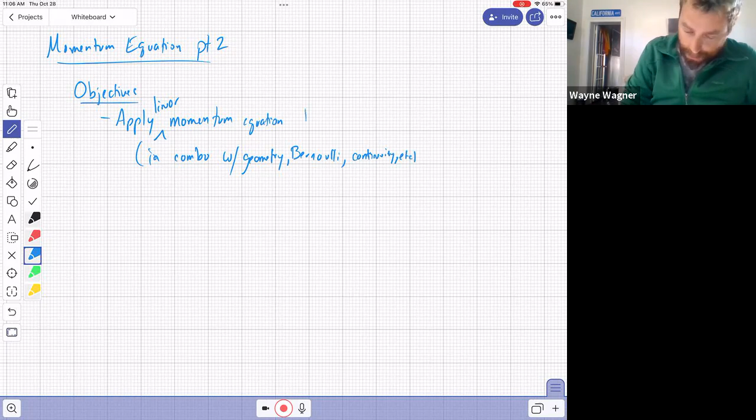Okay, to solve problems, and that's what we're going to do today. How many do I have? Looks like I've got quite a few. I've got 3.

Okay, so let's begin. One of the nice things about working on this board too is I don't have to erase stuff, so we can just kind of move to another area. Okay, so the first problem, this will be example 1 for today.

Okay, given. So we're going to start with forces in bends. This is important because you need to stabilize a pipeline. Okay, so here's what's given: this is a vertical bend. Remember, if it's a horizontal bend, that means it is in the XY plane. This is in the XZ plane, so this means it's going against gravity.

Okay, so here we go, so it's kind of this weird, like it's a bend, but it's also narrowing.

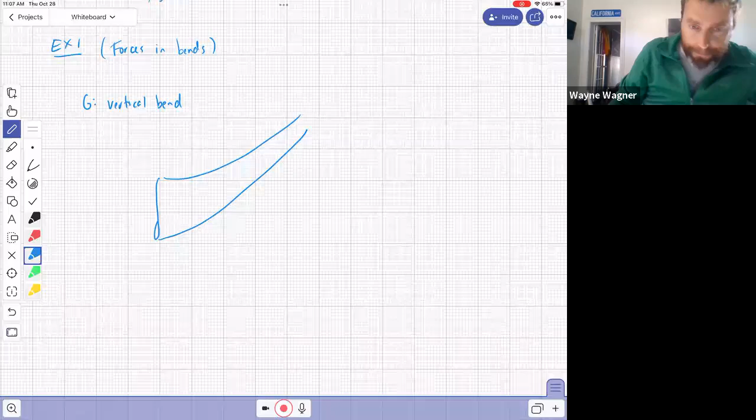Okay, here's our Q, going in this direction. One thing to note, the way I drew these, this is inside of a pipe, so the pipe continues from here. It is not exiting into the atmosphere.

From this point right here to this point right here, there's a distance of 2 feet. This angle is 45 degrees. I hate 45 degrees. I will never give you 45 degrees on an exam unless I screw up, because then I can't test if you know your sines from your cosines.

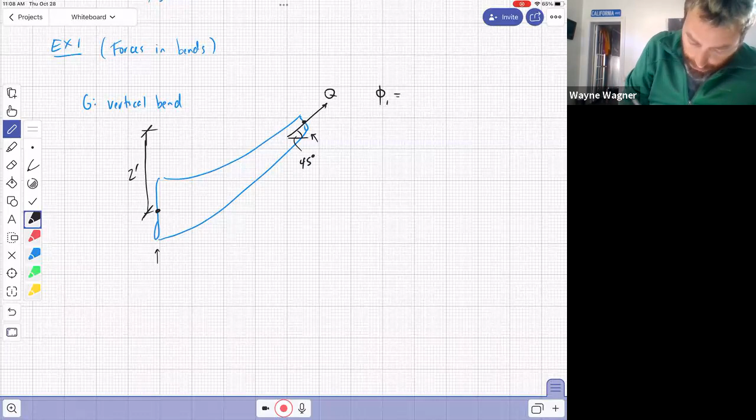So we are also given phi1, which is 2 feet. It's always nice when they give you the points like this. Phi2 is 1 foot. This angle is 45 degrees. Q is 15.7 CFS, I think that's a pretty common number. Pressure at 1 equals 21 PSI.

The mass of the pipe equals 1,000 slugs, and the volume of the water in the pipe is 10 cubic feet.

Required: find the force of water on the bend. Force of water on bend. Solution.

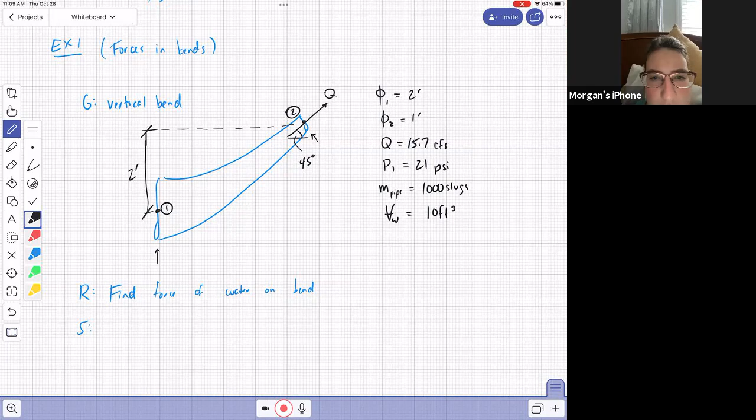First of all, intuition. Which way is the pipe pushing on the bend? What do we expect, left or right? Left. Okay, so you think the water is pushing this way. What about up and down? Up. Which way? Up. Okay, so we think the water is going to push this bend to the left and up.

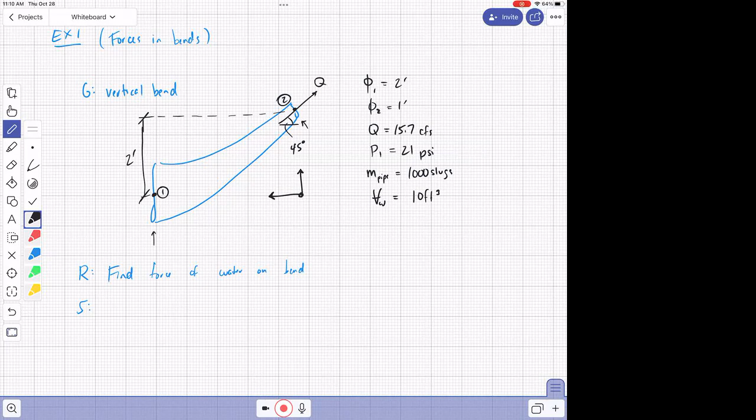But that doesn't work. I mean, unless I'm misunderstanding something, that doesn't necessarily work. What doesn't? Is it flowing out of the right end, top right end? That's what I have backwards right now. Well, this Q is telling us which way the water is flowing. Okay, your assumptions are going to be these are going to be the wrong guesses, but we'll work it out and we'll see why.

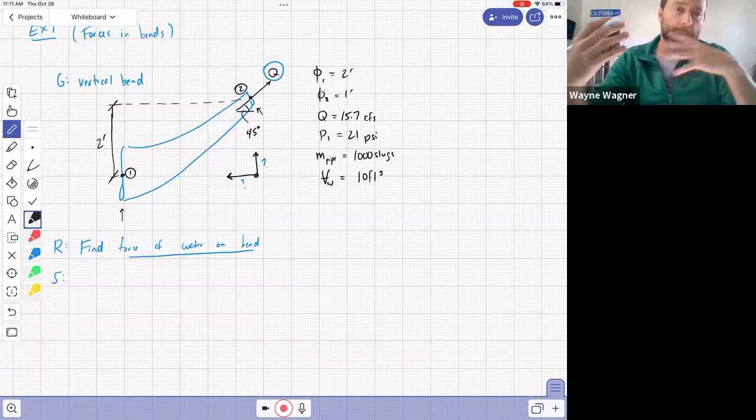So the first thing we're going to do here is we want the force of the water on the bend. This is an interesting question because there are two different ways we can do this. We can draw a free body diagram of the bend and the water, or just write a free body diagram of the water. But in this case, because we want the force of the water on the bend, we need to separate the water from the bend, so it needs to just be the water. If I were to ask what is the force to stabilize this bend, then I would draw a free body diagram of the bend and the water, and I'll demonstrate that as we get towards the end.

So the first thing here is I'm going to do a free body diagram of the water. Just the water. I'm not going to spend a lot of time on this because I've got better things to do with my life. So here we go.

Now I want to start thinking about forces. We've got body forces, we've got surface forces. Somebody shout out some forces we've got. What's the body force? Weight, right. So we got a weight going right here, and that's the weight of what, the water or the bend? The water. Right, because this is the free body diagram of the water.

All right, what else do we have? Now we've got surface forces. So everywhere where I remove the rest of the world, there's a force. Let's start with normal. Normal, what does that mean in this case? Well, because we know the direction of the water is going kind of up and to the right, I would assume that normal is still down with weight, but I think that's the wrong assumption.

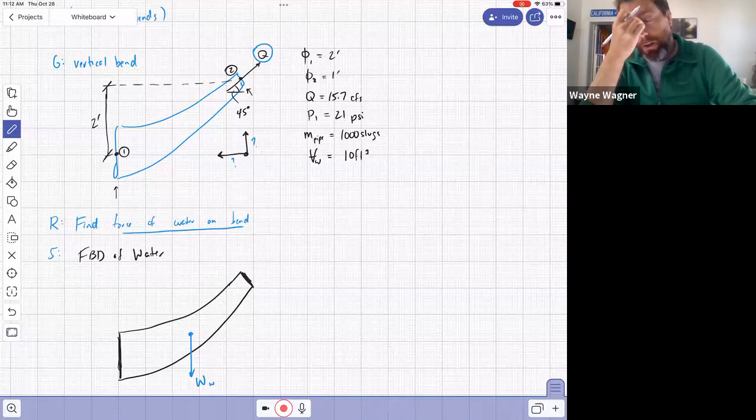Let's back up. Normal force means that two things are touching each other, right? So which two things are touching in this particular normal force? Is it the water and the bend? So there is normal force along these walls, which we might think of as pressure. I'm not going to worry about that normal force right now, and I'm going to explain that in one second. What other forces are along those walls?

Friction. Friction. Okay, so we've got two forces. We've got friction going this way. Okay, and I know it's going that way, or viscosity. And I know it's going that way, and I know I got this normal force. I got all that stuff, and the reason that I have all that stuff is because, well, I've got fluid

flowing through a pipe. Okay, but the thing is, I'm going to combine all of those into the force of the bend on the water. Okay, and I'm going to do that in the x direction and the z direction. I'm just going to assume positive force of the bend on the water in the x, F_Bx, and force of the bend on the water in the z, F_Bz.

Okay, so those are my two, those are just a combination of all these little tiny differential forces. And I'm not going to worry about breaking those apart because it didn't ask me to. And there's no way for me to do that anyway. All right, so that takes care of this surface and that surface.

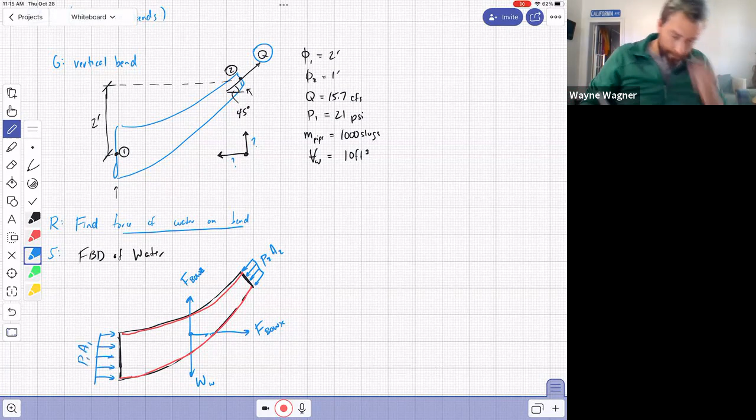Okay, so now we've accounted for all of our surfaces. We got all our surfaces and we did our body force. So now we know we've got them all. Now we have to deal with momentum, which one of you just mentioned. So momentum is going to be accounted for as, I wish I could just erase that red. So the momentum will be accounted for with lines showing where something crosses the control surface. Okay, I guess I'll do it in red.

So here's a momentum term here. This is going to be V2. Okay, and I always make sure that they cross the control surface. So that kind of tells me where in the equation I'm going to put these things. Okay, and here's V1. Okay, so now I've got my free body diagram.

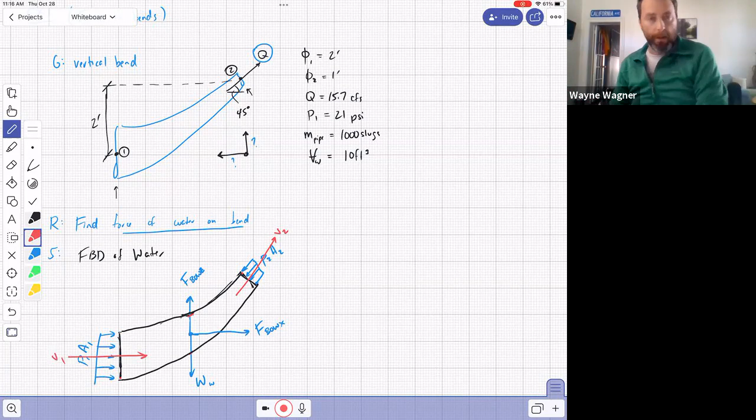By the way, y'all need to work on free body diagrams, clearly identifying forces. You know, I shouldn't have had to pull teeth on this one. I mean, I can understand forgetting pressure, but you got to be able to identify forces. Just saying that. Okay, so here's our free body diagram.

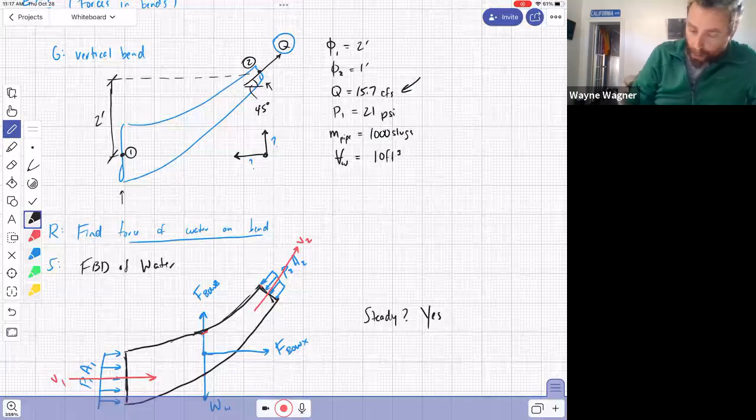Now from last class, I said basically we're going to look for two basic assumptions. One of them is, is this problem steady? And if we look up here, we were given a single Q. So that means we're basically going to say, yes, this is steady. And then we also want to know, does it have a uniform velocity profile, i.e. does V equal V average for the openings? And the answer there is, well, actually, we aren't even given V's. We're only given Q and areas. So we have to assume that this is true too.

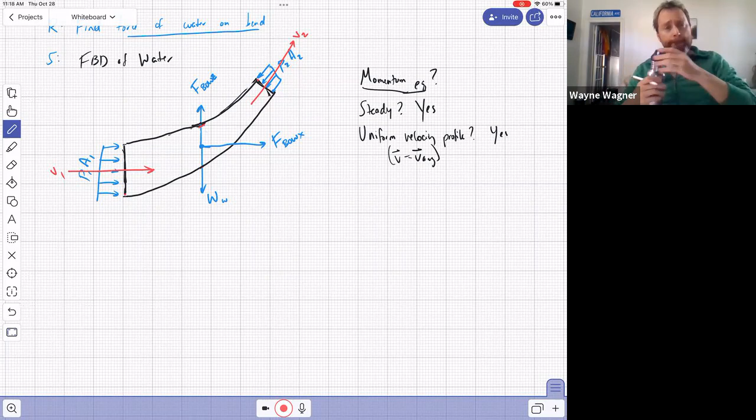If that's the case, then I can use the kind of simplified momentum equation that we've been working on. So again, how do I know that I'm using the momentum equation? Well, the way that I know is because it's asked for forces on a moving fluid. And the only way you can get at that is with a momentum equation. If the fluid's not moving, you can use hydrostatics. A lot easier.

So anyway, the momentum equation, if we can answer yes to both of those questions, can be written this way: the sum of the forces. Notice I'm going to do X and then I'll do Y over here. Sum of the forces in the X. Plus the momentum flux in, rho V_X Q. Well, that usually has a summation in front of it too. Summation in equals summation out of rho V_X Q.

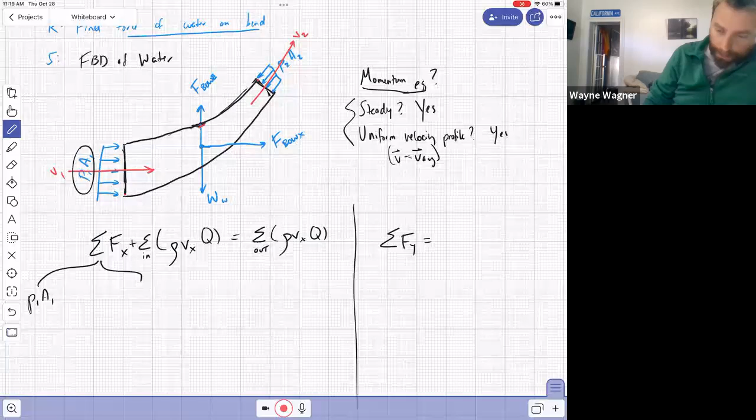Okay, so now we just have to identify the forces in the X. So we're just going to spread this out like this. And so I got, let's see here, we got P1A1. I've got P2A2, which is going backwards. And it's at an angle, cosine of alpha.

Plus F bow X. Okay, those are my forces. Any questions on that?

Okay. By the way, I didn't mean to be too hard on you guys about the finding forces, but my guess is whoever taught this to you did not make you all do enough free body diagrams, and it's just an important skill.

You care. It's okay. What you're asking us to do is we're missing pieces because of obviously the situation. So honestly, it's nice to have somebody care. So I think hopefully everybody understands that you care. It's not that you're even trying to fuss. You're just trying to make us understand that it's important because you care. Right. Well, I am fussing. They're a lot easier for me after I've been awake more than an hour too. Okay. All right. So anyway, I just feel bad when I am rude. So anyway, here we go.

So now this is going to be my in terms. I only have one in term. Sometimes there'll be more than one, but in this case, there's only one place where it's coming in. So these are in red, right? I did these in red, these momentum fluxes. If you have one of those pens or pencils that has multiple colors, it can be nice to draw these in multiple colors, to keep track of what's a momentum and what's a force.

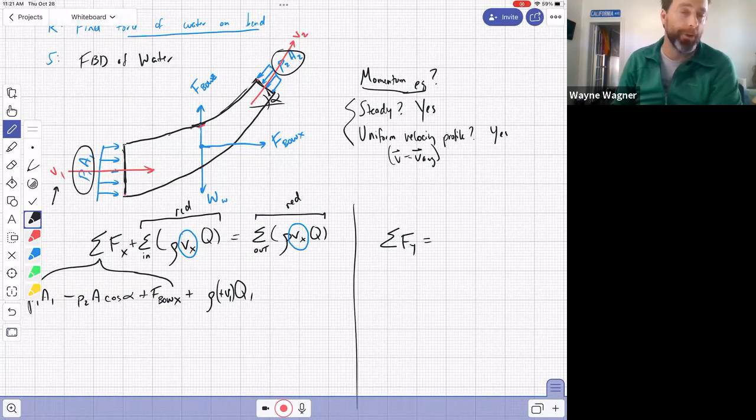And then this is going to be Q1. One thing that I like to do, you'll see this sometimes in my notes, is I'll put a little plus sign there. That just reminds me that I checked the sign or the direction. Because then when I do the right-hand side, this is only V2, right? That's my only out. So I'm going to get rho. So this is V2, so that's going to be positive V2 cosine of alpha.

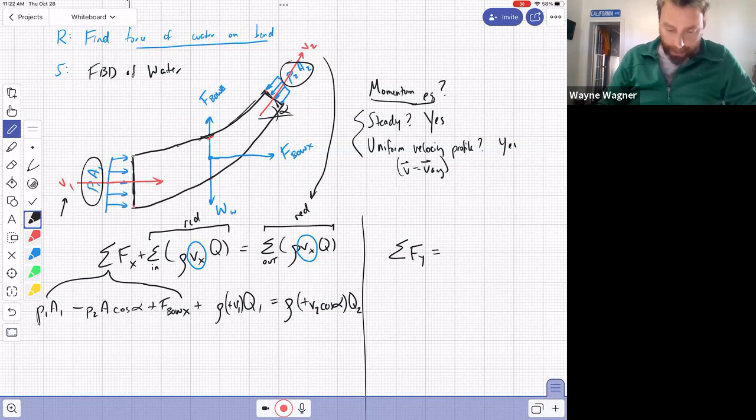And this is going to be Q2. Now notice that Q2 and Q1 are the same, but I just put it as Q1 and Q2 for now, just so you'll be reminded if you're looking at this later, like, oh, I had a problem and it's got 2 Q outs, or 3 Q outs or whatever. Well, you need to separate that all out. Okay, so then this leads to the question. This is nice because this is what we're solving for right here.

Okay, so now we need to think about what we know and what we don't know. I don't know my areas, but luckily I can get those. Right, this should have a 2 on it. And I don't know P2. I know alpha, I know P1, I know rho, I don't know V1, I don't know V2. Those are all the things that I need to solve for. So let's go up here and do my asides. You guys have probably noticed I like to solve with asides. So let's start with those areas. Okay, aside.

Looks like when I solved this the first time, I didn't get the areas, but let's go ahead and do this. So area 1 and area 2. That's pi on 4, pi on 4. And diameter 1 is 2 feet squared and diameter 2 is 1 foot squared. So this is just going to be pi feet squared. And this one's going to be pi over 4 feet squared. Those are annoying numbers, but those are exact. I'll leave it like that for now. We can plug those into this equation. Okay, so now we got this. Any idea how we're going to get P2?

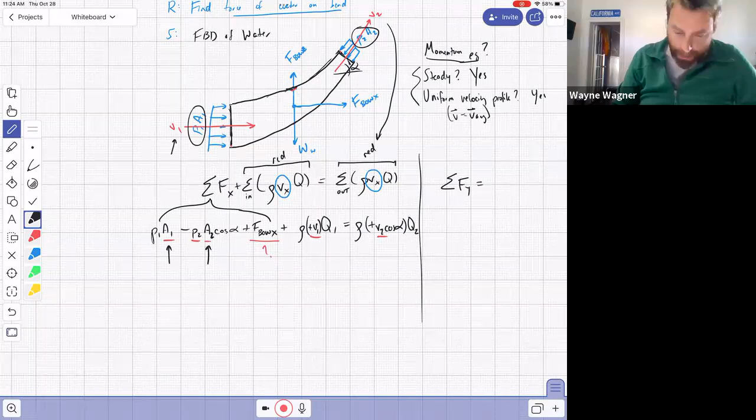Bernoulli's equation. Boom, nailed it. Okay, I should have said this beforehand. This always goes with the asides. It's one of my tools. And we always have, at least for now, 4, I think. Geometry, continuity, Bernoulli. Oh no, I have 5, don't I?

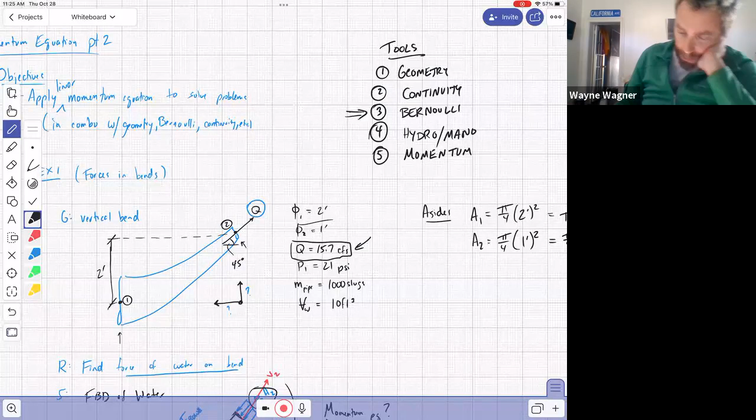Hydrostatics / manometers, which of course doesn't apply in this equation because there's no manometer and all the water is moving. So we're not actually going to use that one for this one. And then 5 is going to be momentum. So if we want pressure, Bernoulli is usually where we're going to get it. So over here, we're going to do Bernoulli.

You know what? We're just going to keep this drawing in. So P1 on gamma plus Z1 plus V1 squared on 2G equals P2 on gamma plus Z2 plus V2 squared on 2G. Hopefully you guys are getting to the point where you can pop that out real quick. Maybe you haven't done the homework yet, but this is going to become a very easy equation for you eventually.

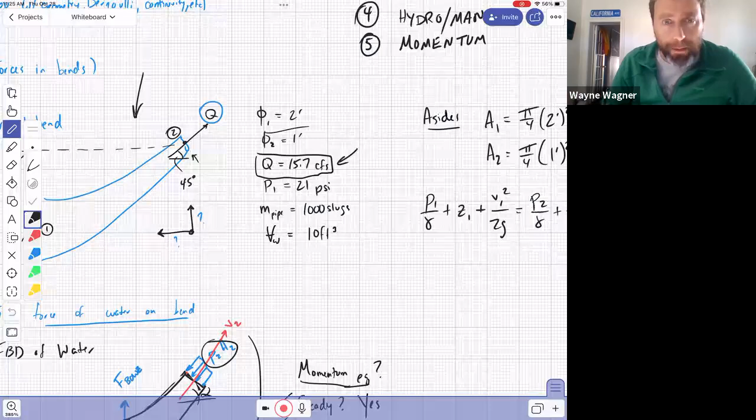What's the problem with P1 right now? Anybody? It's units. Yeah, we don't like PSI, because gamma is in pounds per cubic foot. So we need this to be pounds per square foot. To go from PSI to PSF, we multiply by 144. So 21 times 144, and we get 3,024 PSF. That's going to make my life a lot easier.

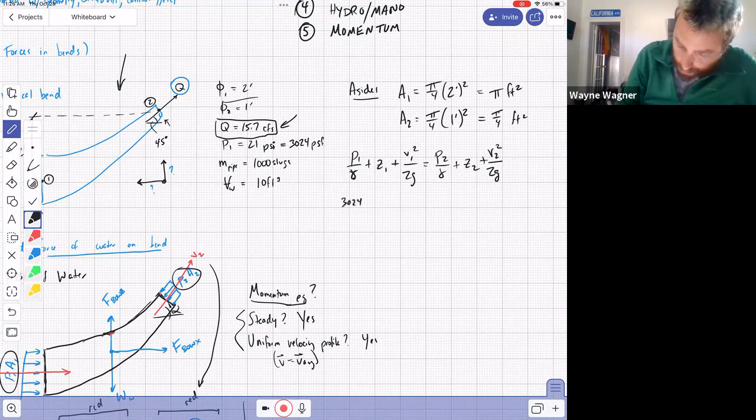So let's start working this Bernoulli as much as we can. We're going to get stuck, and we have to do an aside for this. So we've got P on gamma, 3,024 PSF. Oh, what are our points? In this case, the points are defined by the problem, which is always nice. Over gamma, which is 62.4 PCF. Pound per square foot divided by PCF gives me feet.

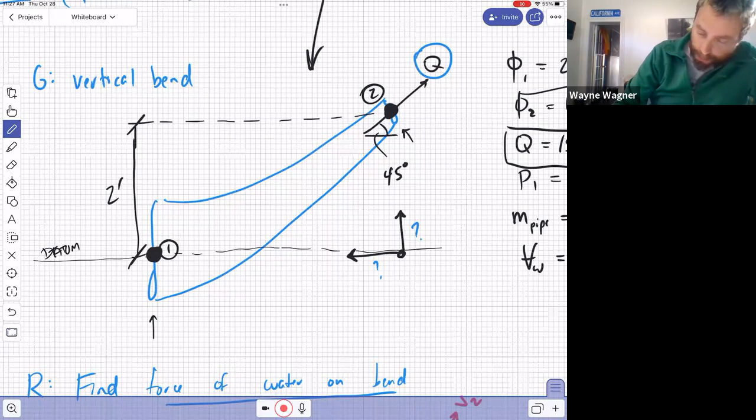Plus Z1 and Z2. How do I get Z1 and Z2? They're the same? They're not the same. Z1 0 and Z2 2 feet. Yep, as long as Z2 is 2 higher than Z1, we're good. What I'll typically do is draw a line through the lower one and say this is the datum. Then point 2 is 2 feet higher than that. So 1 will be 0 and 2 will be 2 feet.

So this is the datum, so it's going to go away. And this one's going to be 2 feet. As long as it's 2 feet higher than the datum, I don't really care. So plus 0 plus, equals. Now we need V1 squared over 2G. Unfortunately, I can't ignore this term. I'll leave the V1 squared out for a second. Then we've got P2 on gamma, that's what we're looking for. P2 on 62.4 PCF plus 2 feet plus V2 squared over 2 times 32.2 feet per second squared.

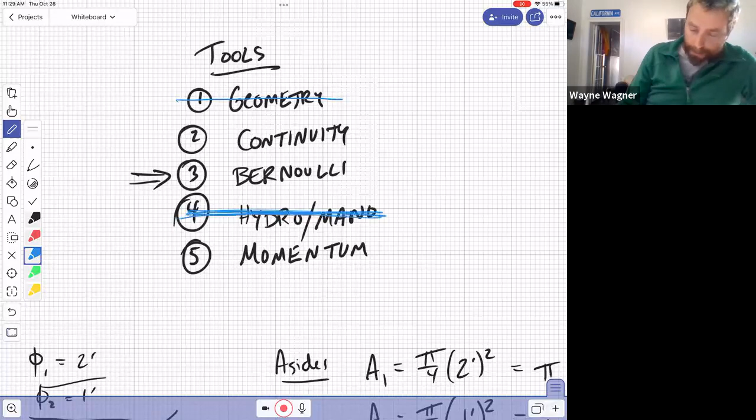How do we get those velocities? Let's go to our tools. We've used the geometry. We're in the process of using Bernoulli so that we can use the momentum. There isn't a hydrostatic manometer. So we've only really got one tool left. Couldn't you use the flow rate? Yes. We refer to that as using continuity. Q equals VA, exactly.

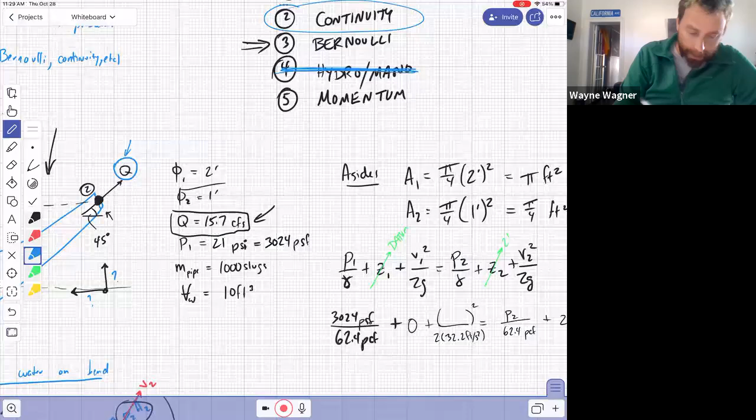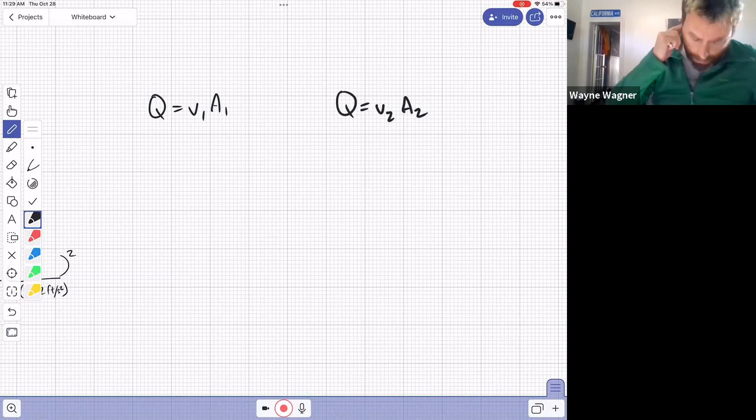So we've got this flow rate right here, and I know these areas, right? Pi and pi over 4. So we'll do an aside to this aside, and say Q equals V1 A1. We're still in that asides realm, and Q equals V2 A2. So Q, 15.7 CFS, equals V1, that's something we're looking for, times A1, which is pi feet squared.

Okay, I don't know why I drew that line. So V1 equals, I think this equals something pretty... oh yes, it does, 5 feet per second. FPS, okay, feet per second.

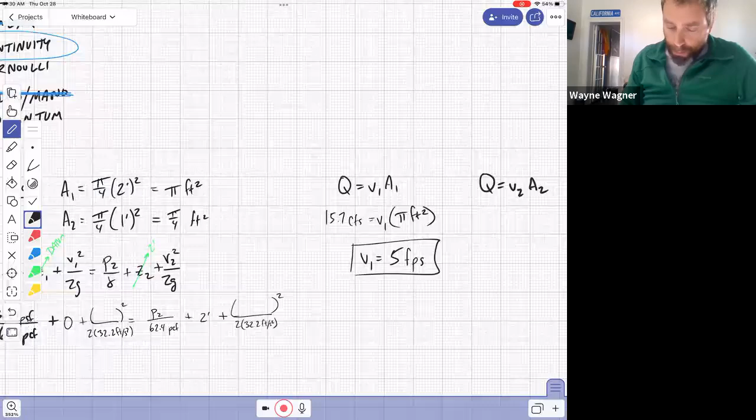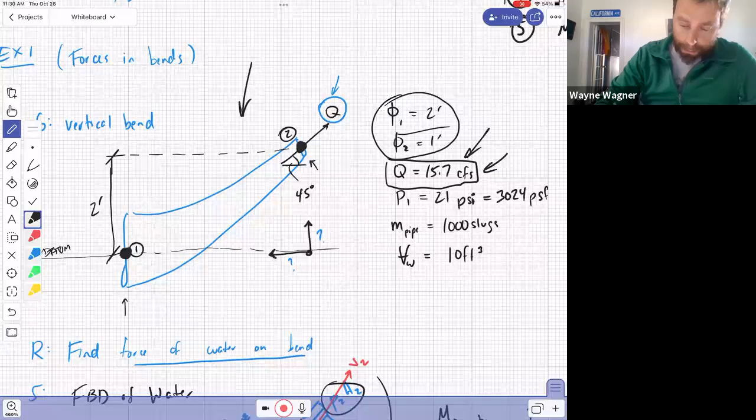Okay, so for Q2, I could bother doing all the algebra here, and it's really not that hard, right? Because we just have a pi over 4, so it's just going to be 4 times as big. But the other thing I always do instead is look at this and say, oh, the ratio of these is 2. So if I square that ratio, it's 4. So the ratio of the velocities will be 4. V2 is going to be 4 times as fast as V1 because it's the narrower end. So V2 is going to equal 20 feet per second. That's awfully nice, right?

So whenever you see 15.7 CFS, you know that's because somebody wanted nice, pretty numbers, so they just did the back math. I didn't create this problem, so I don't get to claim to be that clever or whatever.

Anyway, so we're going to go back over here to Bernoulli. By the way, this is one of the reasons why, if you can't see beforehand what the path of the equations are... I can work this the way I would because I can immediately see the direction I need to go. This is why I like to work with asides when teaching you guys, because when I work it, I just immediately look at it and know which equation I'm going to need and which quantities I need. But you guys, it's your first time through, so you may not be able to do that.

So what can be helpful sometimes is to take your sheet of paper and fold it in half, and say everything on the right-hand side is going to be my asides. That's where I'm working through my equation and I suddenly realize I need some quantity, and I have to go do Bernoulli or continuity or whatever. So I try to work these not the way I would work them, but the way I think you might approach them. So it's good to think about separating off an area of your paper so you can solve for things you need for the main equation.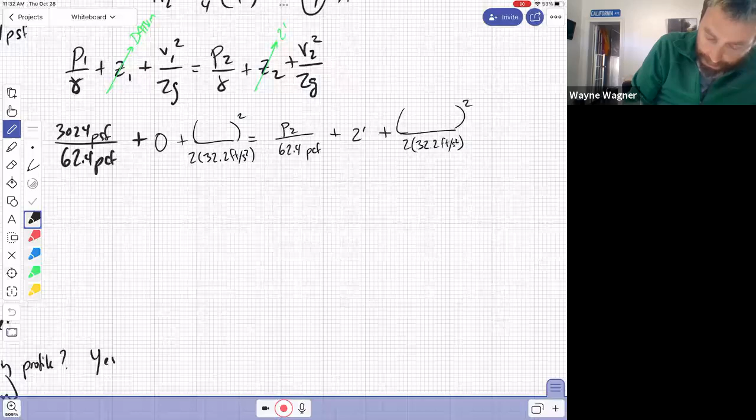Anyway, so this is going to be 5 feet per second, and this is going to be 20 feet per second. Okay, so we could solve this right here if I wanted to, we could just plug all this into the calculator. I'm going to leave this open for just a second, because I like to think in terms of orders of magnitude here. Unfortunately, when I did these notes, I did not keep 5 sig figs, so we won't have this perfect.

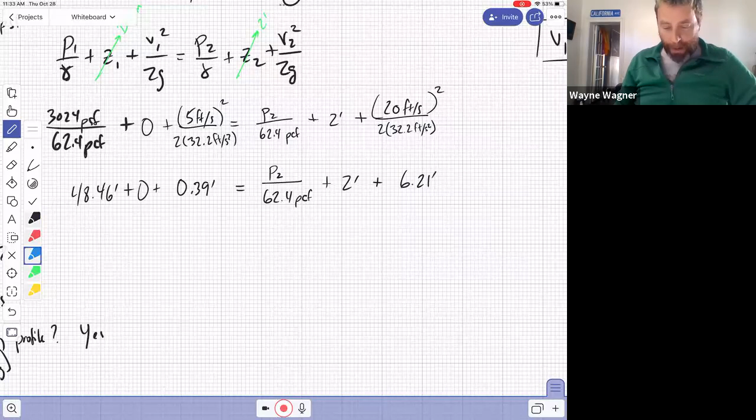Okay, I want you to just note real quick: in this particular bend, this is all about energy. As we traveled from 1 to 2, from here to there, notice I had to raise the fluid by 2 feet, but I also had to add the amount of kinetic energy by almost 6 feet. So that was more important in this particular problem, the kinetic energy transformation was more important than the potential energy increase. However, note that in total, I had to add about almost 8 feet of head to this fluid.

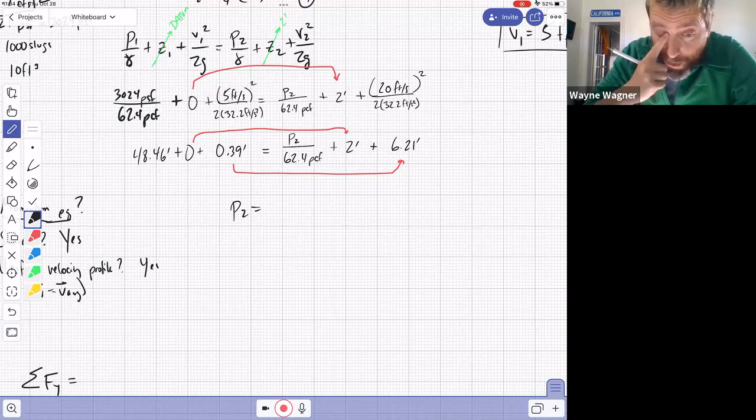So where is that going to come from? Well, it's going to come from the fact that I'm going to lose pressure in the fluid. So P2 is going to be less than P1. If I solve this, I'm going to get P2 equals 2536 PSF. So basically I lost pressure, and that pressure was converted into elevation and velocity.

Okay, so that's the pressure we're going to work with. Now note we compare that pressure to this pressure right here. If I wanted to, I could divide by 144 and compare it to the original 21 PSI, but there's no real reason to do that. Okay, so now we've got the pressure. So let's go back down and keep track of what we're looking for here. We've got P2, V1, V2, we've got everything we need.

At this point, this is just an algebra equation. I'm going to kind of just plug and chug here. But hopefully you guys can see how to solve this.

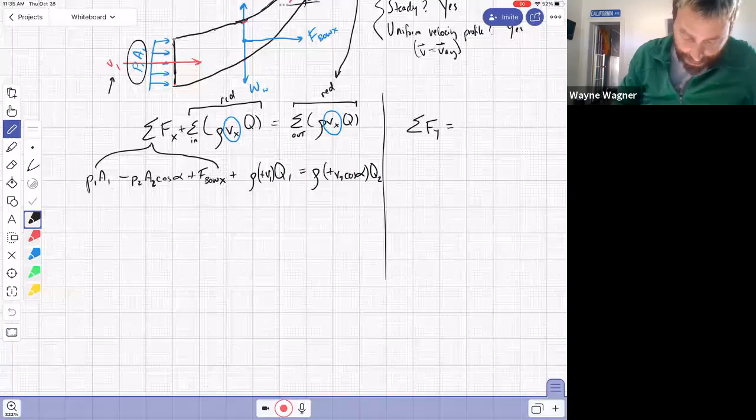Okay, so let's see here. P1... oh man, interesting, okay I did this all weird, but that's okay. P1 is 3024 PSF. Notice the area is pi over 4, the diameter was 2 feet, squared. PSF times square feet gives you pounds.

Minus P2A2. P2 was 2536 PSF, times its area, which is pi over 4 times 1 foot squared. That's going to be times cosine of 45 degrees, plus F bow x.

Then I'm going to add one more term, rho V1 Q1. Okay, so anybody remember the rho of water? Anybody know how to get the rho of water if you forgot it?

Like 1,000? Okay, if we were in the SI system, by the way, perfect. 19.4? Ooh, close. 92.4, isn't it? Hold on. Wait, what, 92.4?

19.4, 62.4 - somebody, Caesar, just typed that in. Okay, I wanted you to make these errors. I'm not sure which is the closest. I think maybe these two are the closest. This one is close, this one is way off. Okay, right, it's the one on the formula sheet that isn't right. Thank you, Stephanie, that's exactly right.

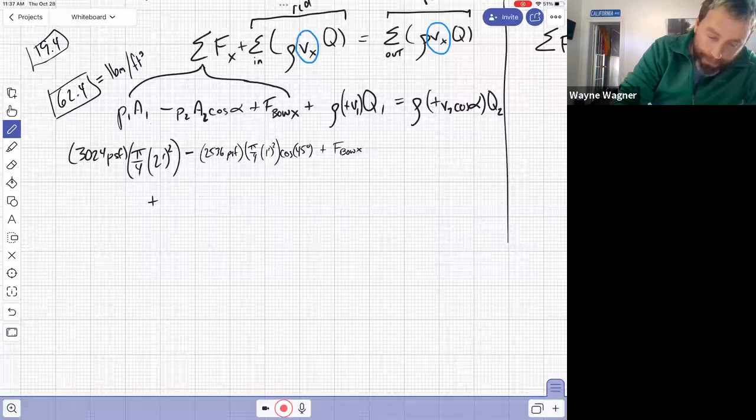Okay, rho does equal 1,000, but that's in terms of kilograms per cubic meter, so we can't use that because this system isn't SI. Dominic, thank you, this is the most common error I get, so just be aware of that. That's a great error. I don't know where 92.4 came from, my guess is you're just mixing up some numbers. 19.4 is very close but off by a decimal. And 62.4 is pounds mass per cubic foot, or pounds force per cubic foot - so either, not equals.

So we can either say this is gamma, the specific weight, and this could be density. But you guys should know by now, we don't use pounds mass in this class, so for density we need slugs per cubic foot. What you need to remember is this 19.4 is right, but you're off by a decimal place. So if you get stuck, remember gamma equals rho times g. Gamma looks like this: 62.4 PCF equals rho times gravity, 32.2 feet per second squared. So rho equals 62.4 divided by 32.2, which is 1.94, and this is slugs per cubic foot. As I think Stephanie wrote in, it's wrong on the equation sheet.

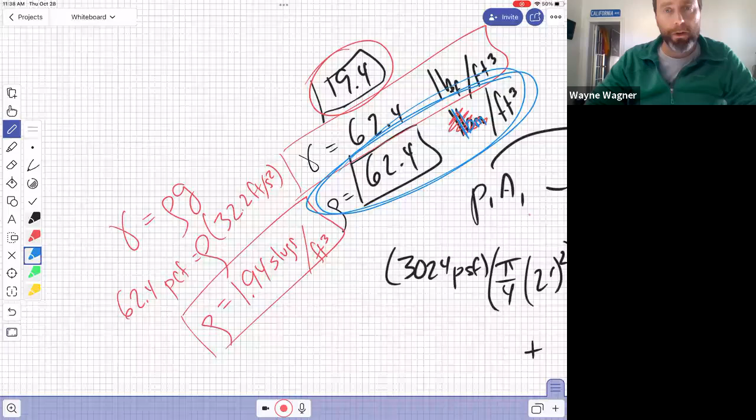On the equation sheet, it's given to you like this. If you plug a pound mass into that formula, you're going to get it wrong. So I'm taking a moment to warn you, but I'm still giving you that equation sheet, so you're going to have to make note of that. When you're doing your homework and you pull that equation sheet out and see this thing, your little alarm bells need to go off in your head.

You might be like, well why are you giving that equation sheet? Because that's what they're going to give you on the FE. And when you take the FE and you see rho equals 62.4, I want you to say to yourself: divide by gravity, gravity is 32.2. So that you can get it in slugs, or else you're going to get the wrong answer. I'm making a big deal about that - I didn't really expect anybody had it memorized, although somebody was close, 19.4 is pretty close.

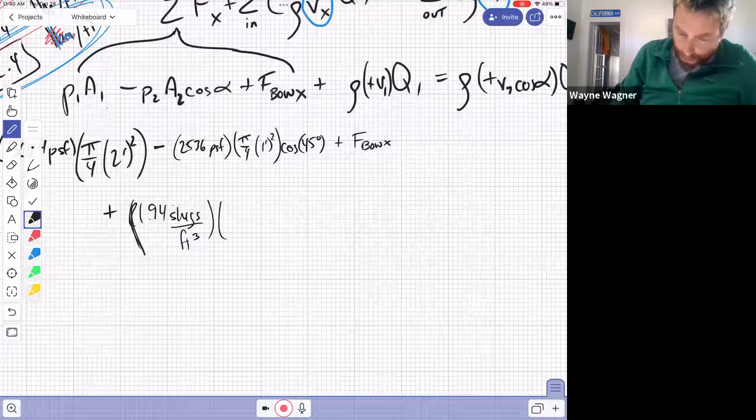All right, so here we go: rho equals 1.94 slugs per cubic foot. You don't need more than 3 sig figs here - if you do 62.4 divided by 32.2, you'll get extra numbers, but don't worry about those. V1 was 5 feet per second, and V2 is 20 feet per second. So this is 5 feet per second, Q is 15.7 CFS, equals 1.94 slugs per cubic foot times 20 feet per second times 15.7 CFS.

Okay, so let's plug all this in. The only thing I want you to be aware of here that's annoying is we always need to check our units. I always like to remember that force equals mass times acceleration. So in the SI system, that's newtons equals kilograms times meters per second squared. But in the British, or American system, it's pounds equals slugs times foot per second squared. That's why we need to do this in slugs.

So our pounds are coming from slugs, foot, per second squared. That's a pound. Slugs, foot per second squared. That's where our pounds come from. And then this cubic foot is going to cancel with this cubic foot, and this cubic foot is going to go with that cubic foot.

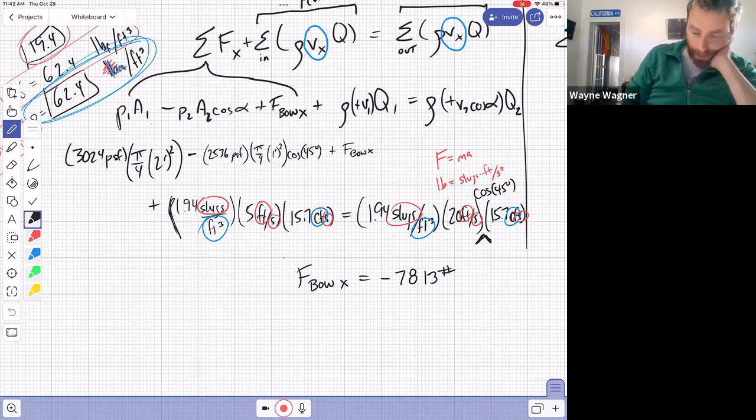You will note also, algebraically, if you guys get online and start looking at how other people do this, a lot of people will combine these two terms on the same side of the equation and pull out the density, pull out the velocity. Sometimes they'll pull out the velocity squared since there's a second velocity in this term, so you'll see this written as rho v squared A. You will see that. You can do that if you want, I just don't do it that way. I think it confuses my students more than it helps them, but you can.

All right, so that's it. Now we're going to go to the y. Wait, any question on the x direction?

Okay, I've forgotten what the question is, but this is the bend on the water. If I want the force of the water on the bend in the x direction, then it's going to be 7813 in the other direction, right?

Okay, so just keep that in mind. Again, that's my terminology, bend on water, water on bend. If you want to do a different one, you can go for it. What I don't like is a lot of people will just write F of x. In fact, if you look at some of my old work, you'll see me writing F of x.

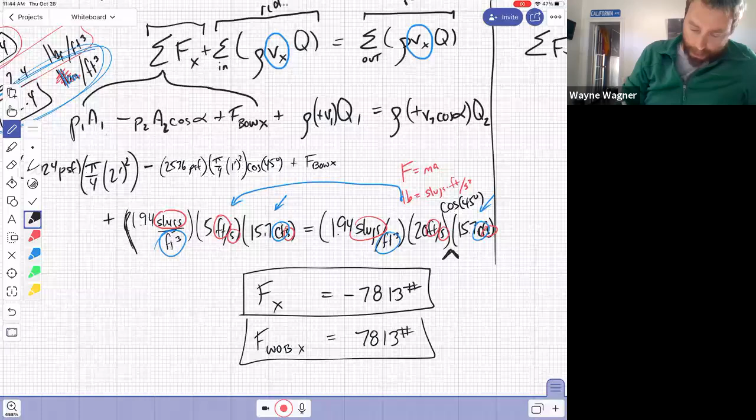The problem is then you're doing the sum of F of x, and one of the things you're plugging in for the sum of forces in the x direction is the force in the x direction, and I don't think that's very helpful. So to me, it's better, if you do computer programming, to create variables that are clear, that take you another split second to write out, than to write ones that are very simple. If you start coding on a computer and just decide you're going to call everything X or Y, eventually you're going to forget what X and Y are. It's better to call it something like A for area, or A underscore pipe for area of the pipe, or whatever. Just something to consider.

All right, so let's do... I had a quick question. Sure. That negative does indicate that we assumed the wrong direction, right? That's correct, we assumed the wrong direction.

Okay, but that's why I always assume a positive direction, because then assuming the wrong direction, I get a negative sign. That means both things in that case, right? But if I assume a negative, then that means it's a positive, right?

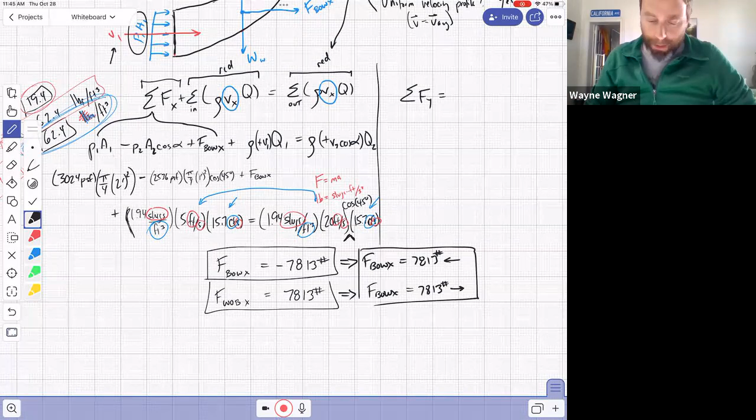So yes, I guess the other way to do this normally would be to say F bend equals 7813 pounds that way, right? So depending on who taught you statics, Dominic, I know who taught you statics, but some people will ask you to just put the little arrow in, which maybe I should have asked my students to do, but I didn't. All right, so let's do the vertical direction.

Sum of the forces in the y equals... oh, we forgot, plus the summation of the ins, rho v Q.

Okay, let's see, this is going to be Vy. Again, noting this is the only thing that has a direction in the momentum term. Equals sum of the outs, rho v q. I'm going to go ahead and put a y right there. So let's go ahead and look at this thing.

What forces do we have in the y direction? Somebody want to shout them out? There's my free body diagram. Weight, right, and that's the main difference between these two, is I've got the weight of the water. That's negative. What else?

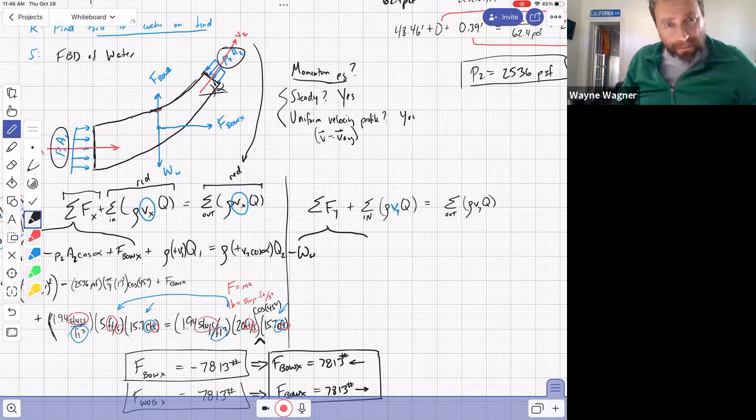Are there any other arrows on this thing? Blue arrows? In the Y direction? F bow. F bow Z, so bows, it's F bows. Okay, I've got one more.

P2, A2. Minus P2, A2, sine of alpha. Notice again, and I need to reiterate this, pressure is always pushing. I guess that's not technical - you could have negative pressures, but you still draw the arrow pushing and it's a negative pressure. In an absolute sense, all the pressure is pushing, but in that case it's equivalent to a pull as far as the net effect, because what it really means is there's a pressure on the other side somewhere that is positive, or that is pushing harder.

Anyway, ins in the Y direction. Do we have any ins? Notice now we're looking at these red arrows, red, red. So these are my velocities. So V1 is in.

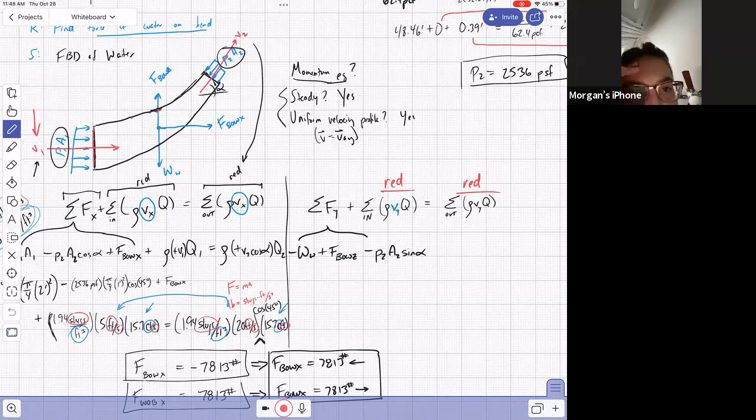It looks like it says P1A1, but you want to call it V1, I'm assuming? In the blue arrows, you have P1A1, but in the red arrows it's going to be V1 to go in the Y direction equation. I wanted to make sure I was reading the diagram properly. You are - so the pressure on this surface is P1A1, but the fluid is flowing across that surface, and so that's V1. Okay, thank you.

All right, so note that neither V1 nor P1A1 are in the Y direction. So we don't have anything flowing in the Y direction. In the Y direction, however, we've got V2 flowing out. So I'm going to do rho V2, which is, in this case, positive V2 sine of alpha. Now again, note that I put my little plus sign in there - it's not necessary, but it just kind of helps me keep track.

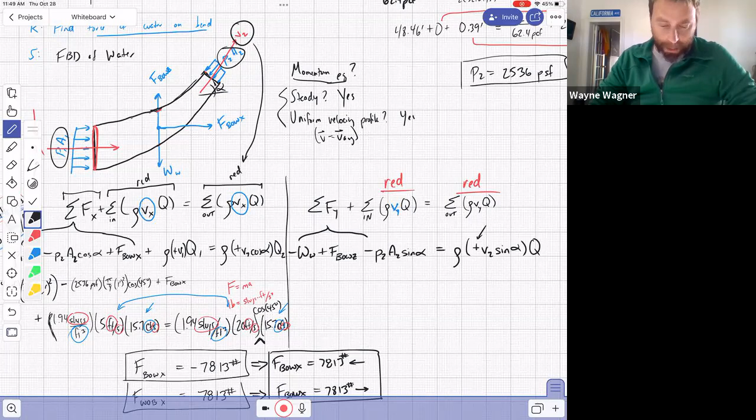And then Q. So now I'm basically all ready to go because we've already done this. The only aside that we have is, how do we get the weight from what we have up here? How do we get weight in fluids class? In the other classes, it's mass times gravity. How do we get weight in this class?

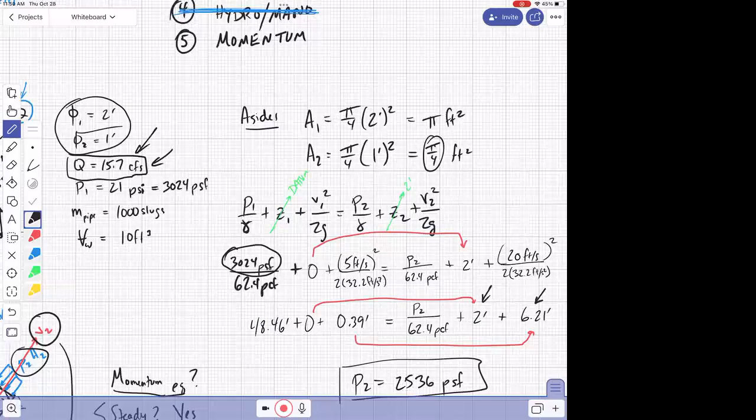Volumetric flow rate? No, just because the water is moving doesn't change its weight. Volume and density - volume and specific weight. Okay, so let's just go ahead and do that over here. So we've got a volume of water, 10 cubic feet. That's the volume inside the bend. So weight equals gamma water, in this case, times the volume of water.

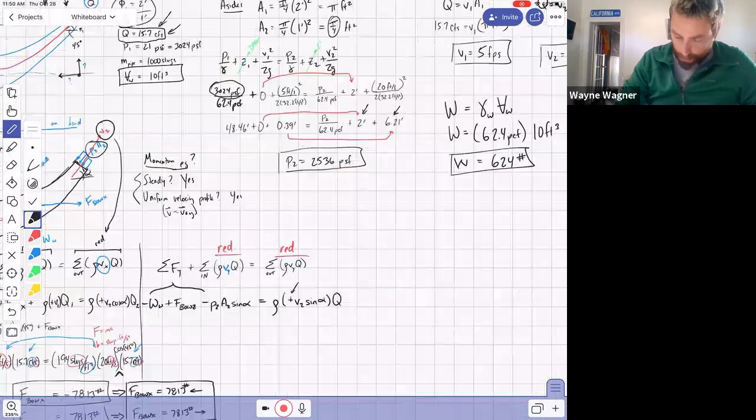So this one can be done in our heads. Remember the gamma - what's the gamma of water? 62.4. Yep, 62.4. Sorry, I'm gonna try to keep remembering to ask you guys that. It's the sort of numbers that once you've done this a lot, they just kind of stick into your head.

624 pounds. So comparing that to what we got going on here, it's not unimportant, but it's an order of magnitude smaller. Okay, so let's go ahead and we're just going to plug all those numbers in. This is negative 624 pounds plus F bow Z minus P2A2.

We've done this already. What was all that? We did this over here, right? P2A2 - this is this right here. All right, so 2325... dang gummits, I'm losing my work here. 2536 PSF times A2. What was A2?

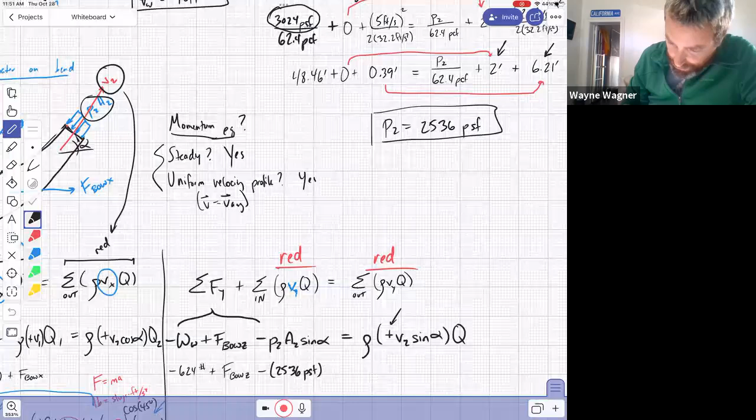A2 was pi over 4 feet squared, times the sine of 45. Thank you, Christian, because I would have messed that up there. Equals the rho - now remember the rho is 1.94 slugs per cubic feet - plus V2, which V2 is 20 feet per second, times the sine of 45 degrees. And then the Q, which is 15.7 CFS.

Okay, or CFS. So, biggish equation. Let's check our units here. PSF times square feet gives us pounds. Slugs feet per second squared, that's my pounds, and then the cubic feet cancel. So I'm gonna get pounds. So if we solve this all the way, I'm gonna get...

F bows equals 2463 pounds. No, not Fy, F bows. It always makes me think of the Nintendo turtle, bad turtle, Bowser.

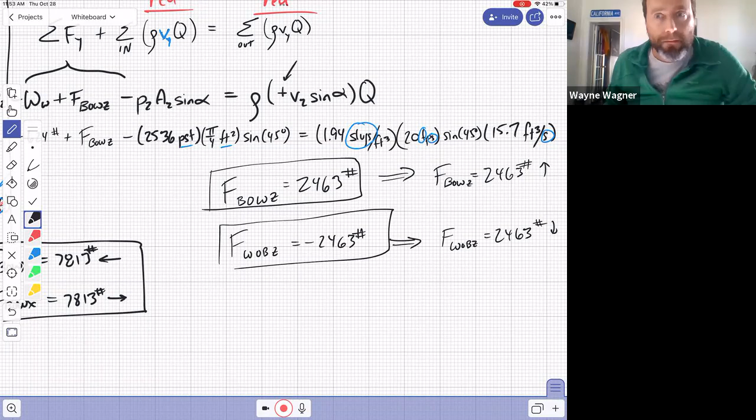Okay, let's see, we're doing okay for time. So what I want to drive at here is: bend on water in the Z direction, bend on water in the X direction. Let's take these one at a time.

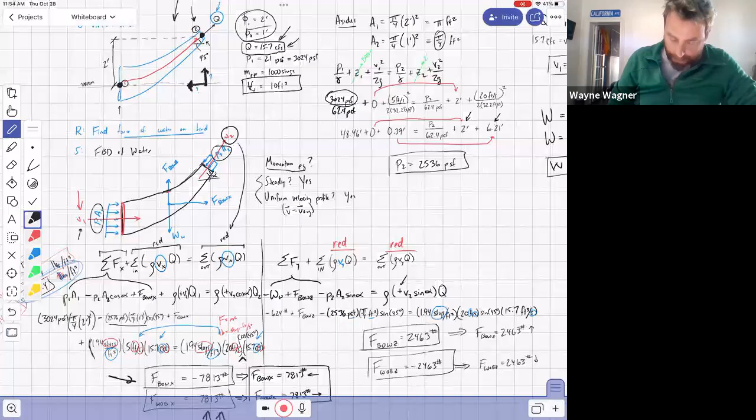Our intuition up here was these were my guesses. I don't remember if I was asking which way the water was pushing on the bend or the bend on the water, but let's think about this. Bend on the water in the X direction.

Well, the water is cruising along here, minding its own business. And then all of a sudden it hits this bend over here. The only way that bend could have pushed on that would have been back to the left. Hence its momentum in the X direction changed. There was no way for this thing to somehow accelerate it in the... yeah, that's actually not entirely true. But anyway, so the force of the bend on the water is in fact in this direction.

And then the other thing is, what about the force of the bend on the water in the Z direction? Well, notice we got a positive number for that. Think about it this way: it came in with no momentum in the Z direction, and then it leaves with some momentum in the Z direction. Where did that momentum come from? Well, the bend had to push on it.

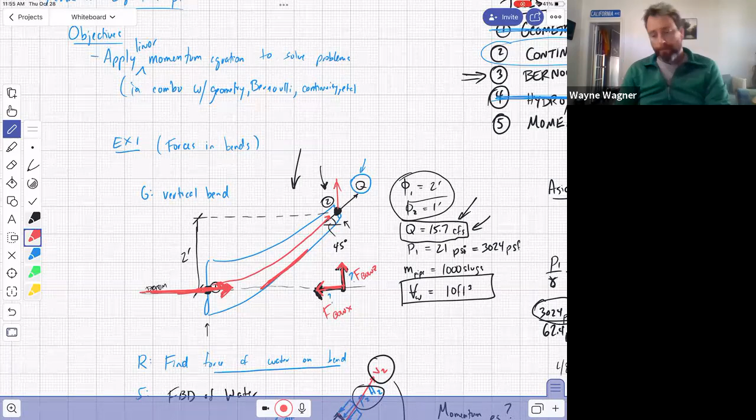The other thing the bend had to do is hold up the water itself. So that's the weight of the water, and that's why this kind of has that direction. Now on the other hand, the force of the water on the bend, the water is pushing the bend in this direction, just because there's basically something in the way of the water.

The water wants to just keep going right forever. And then the water is pushing the bend downwards. That's really kind of hard to see, I don't really have a good way to describe that. I think if you're a biologist, they would call this an acceleration reaction, which is meaningless to me.

But it's easy to just think about it as equal and opposite. So the bend is pushing the water up, so the water is going to push the bend down. It's coming here and it's hitting and bouncing that way kind of. So the net effect is to move the bend that way. I don't know, anyway, that's how I think of it.

So in this particular case, for this problem, what did we ask for? We said, what is the force of the water on the bend? So force of the water on bend equals the square root of this one, and that one squared, which I'm not going to work out for you guys, I know you can do that. And we get 8,192 pounds.

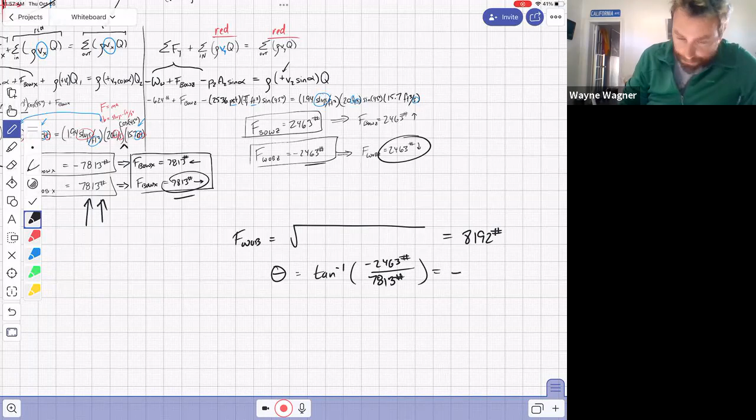And then we need to get the angle, theta equals the inverse tangent of negative 2463 pounds over 7813 pounds. If you do it like that, it'll actually take care of the sign for you, giving 17.5 degrees. So in this class, we would say force of the water on the bend equals 8.19 kips at an angle of 17.5 degrees. Okay, and I'm assuming you guys know how to do this.

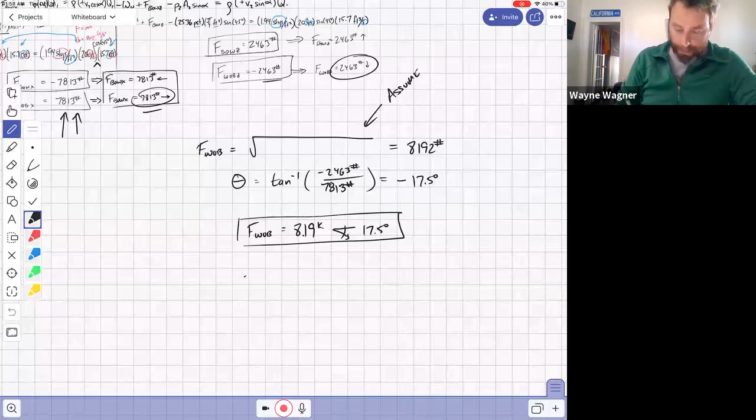All right, so let's see what we can do with these other problems. Oh yeah, okay, so in this case, I just wanted the force of the water on the bend. So when I drew my free body diagram, I drew my free body diagram of the water. For this next one, I'm going to ask for something slightly different, and so we're going to get a slightly different thing to work with.

Okay, so wait, okay, yeah. Please interrupt me if you have any questions.

Okay, so this is going to be example 2. And this one is, again, going to be about anchoring forces, which is very often how we do these. All right, so this is one of those nozzles that you see in your science lab, where you've got a hose coming down like this, and then there's a nozzle built in on the end of it. Somebody asked a question about the nozzle not that long ago.

Anyway, so right here, this opening is 5 millimeters. Always when you see millimeters, immediately think, okay, I'm gonna have to convert that to meters. This is 16 millimeters. Okay, and then what do we got? So this is given. Q equals 0.6 liters per second. Nobody likes that. The mass of the nozzle itself is 0.1 kilograms. Okay, we're fine with that unit.

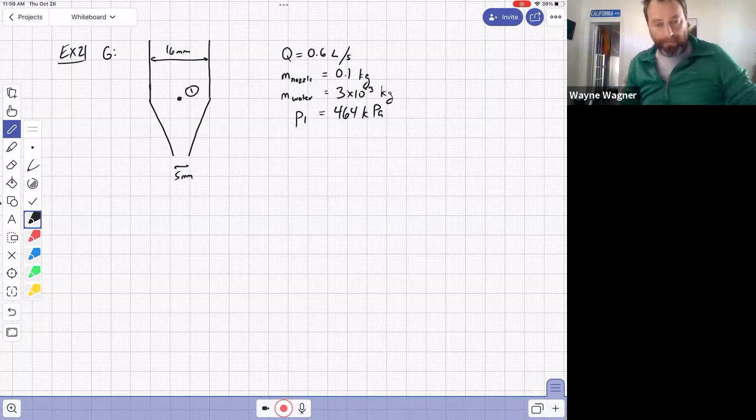The mass of the water in the nozzle is 3 times 10 to the 3 kilograms. So very small in the grand scheme of things. And then P1, and luckily they tell us where P1 is. That's right here. Is 464 kPa. Okay, so then the last bit we want, so this is required. We want to know the force to anchor the nozzle.

Okay, and before I get into this, I want to just discuss real quick. There's two kind of competing forces here for this nozzle. First I'm going to draw my control volume, and my control volume is going to be right here. I'm choosing that point 1 because that point is given to me. They tell me the pressure there. I know information there. And I'm going to go around this whole thing like this. That's going to be my control volume.

I'm going to assume that the weight of the nozzle and the water is not really important, but basically I'm going to have a pressure at 1 that's going to be pretty high. That's going to be pushing downwards, and so that's going to cause the nozzle to want to fly off. On the other hand, I've got this water which is being accelerated through there. So there's this jet of water leaving at point 2. That's going to have way more momentum than it has at 1. That's going to cause it to want to jet upwards. So it's competing forces here. I have a feeling, and probably your gut should tell you, that the pressure at 1 is going to be greater than that momentum, right? But let's just go ahead and work this.

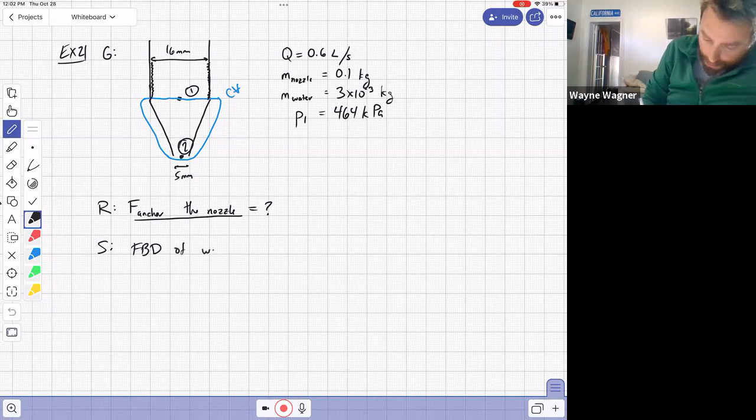Okay, now I want you to notice that this is the F to anchor the nozzle. Where that force is coming in is basically, there's probably some threads along here and the nozzle probably screws in. So that's really where that force is. So when I'm drawing this free body diagram, I'm going to include the nozzle. So free body diagram of water and nozzle, because I want the force of the anchor on the nozzle.

So the force of the anchor is probably in those things. So it probably looks like this, or something. Yeah, that's terrible drawing. Because it's not really that important to be perfect. And I make no aspirations to perfection, but there are still limits. Okay, so something along those lines.

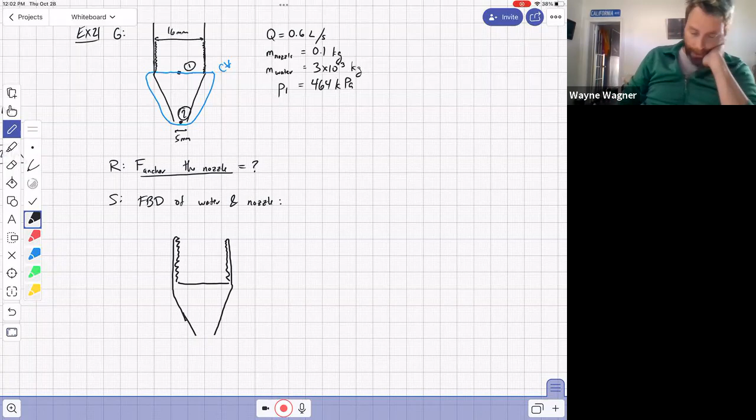Okay, so then what we need to do is identify forces. I'm going to do my forces in blue again, just because I have different colors, so I might as well use them. I'm going to start with body forces. I've got the weight of the water. And I've got the weight of the nozzle, which I'm going to draw over here, even though it's really acting at the centroid, which is probably over by where I wrote the weight of the water. I include both of those because it's the free body diagram of the water and the nozzle. So it's important to identify what you're drawing the free body diagram of. Okay, other forces. Do I have any pressures?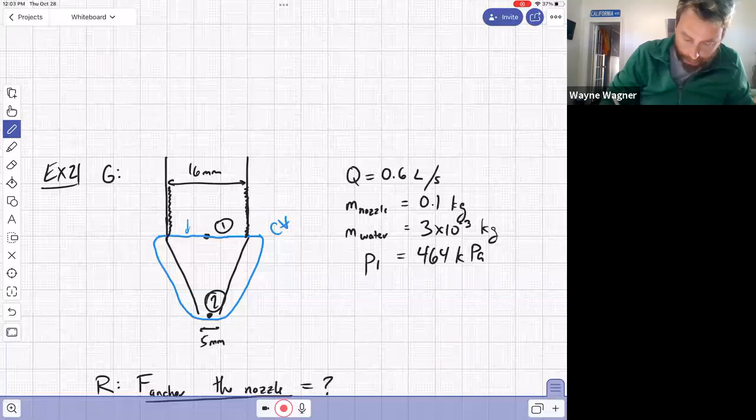Let me ask you again. Do I have any pressure? I think they have a P1. Yeah, we have a P1, right? So that P1 is right here, right? It's all along this surface right here. What about P2? Do I have a P2?

Sure, you have to use Bernoulli's equation, right? We could, but I don't think I'm going to. Why not? Look at something special about the way I drew this. Okay, this is a nozzle, right? So this is like one of those faucets you have in chemistry class, right? Well, you can use your diameter ratios. No, well, we can do that to get the V2, but what are we thinking about here instead?

Like this is something more basic. What's the pressure at 2 if 2 is going out into the classroom? Oh, 0. 0. Okay, so always look for that. So in this case, I could draw a P2A2 like right here if I wanted to. But notice that I'm just going to say that it's 0 gauge. So there's no real reason to do that. Okay, so we won't do that.

I shouldn't have just undid that because that means in the recording, it's not going to record it at all, which is really annoying.

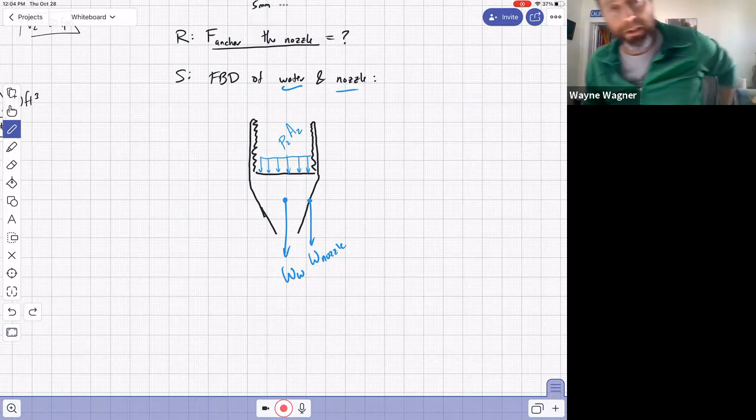Do we have any other forces? Friction between the nozzle and the water. Okay, excellent question. Turns out that it's incorrect, but yes, exactly the right instinct. Go ahead, Stephanie. Do they cancel each other out because we're doing both of them in the diagram?

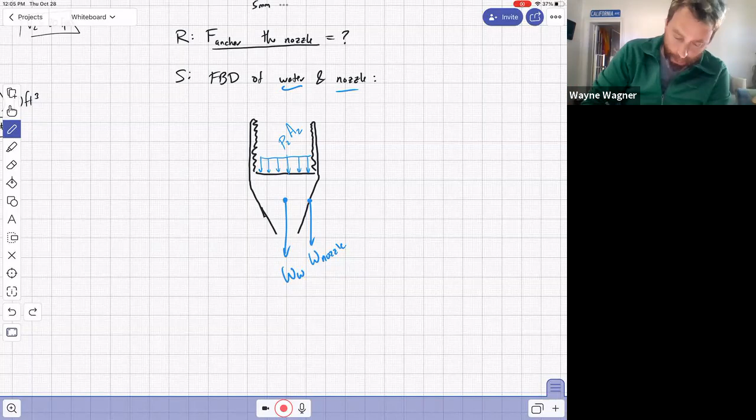No, because the net effect of the friction on the water and, say, the normal forces, the pressure between the walls, will be upwards, the net effect. However, all of that is taking place right in here. Those are internal forces to our diagram. Okay, so over here, we drew the water itself. So we had the force of the bend on the water. Okay, but here, I drew the nozzle as well. So this is inside that diagram. So we can't even resolve that.

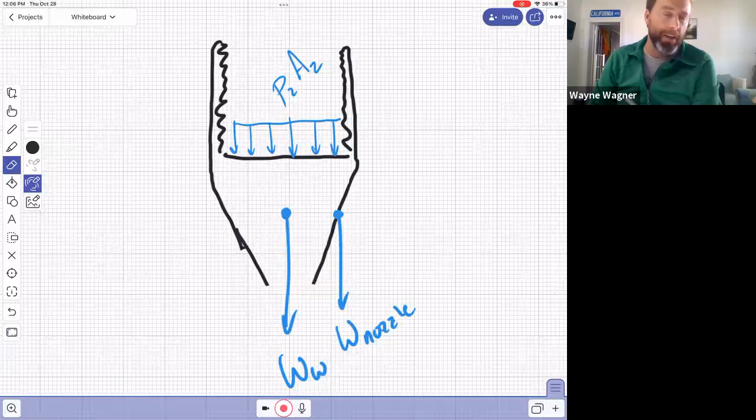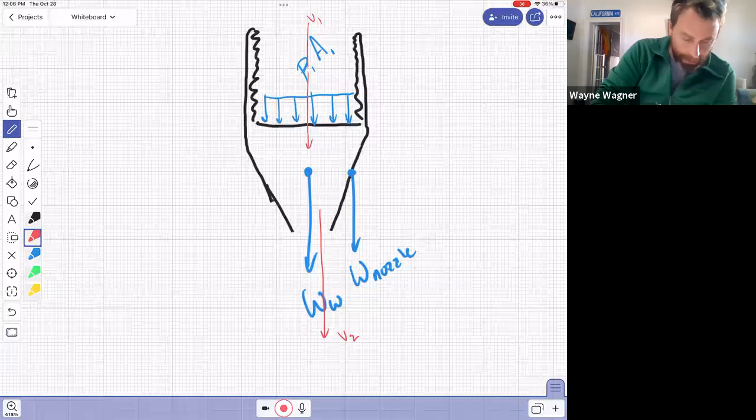Okay, but right now I've got 3 forces downwards. Well, I haven't done the momentum terms, which we would do in red. Should be a V. Sorry, this would be a V1. Okay, so this is going to be P1A1. Okay, so I haven't even drawn these yet, but what about these little things over here? What about these little teeth?

Okay, that's like a screw, okay? And that is a force we're going to assume is going upwards. This is the anchoring force, okay? I'm only going to do it in the Y direction because there's not going to be anything going on in the X direction.

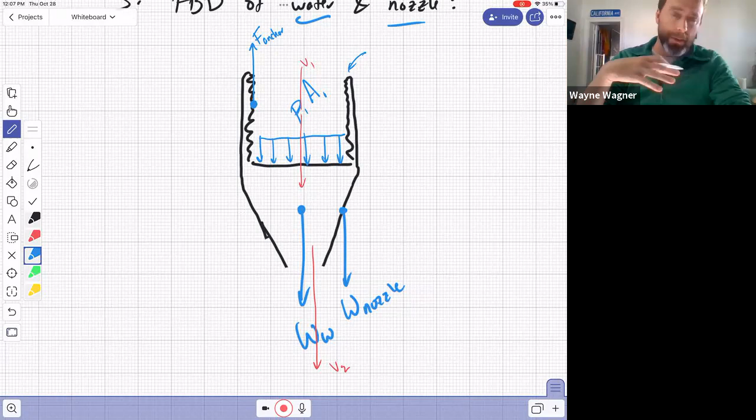Okay, so if you'd wanted to, you could have drawn the water, right? You could have done the force of the anchor or the nozzle on the water. And then once I'd solved that problem, I could go back and say, okay, I've done the force of the nozzle on the water. Now I want to figure out the force of the anchoring. So I need to do another free body diagram of the nozzle itself, but that's just complicated. So we're going to do it like this. Does anybody have any questions about these forces?

The only question I have is you have a lot of cool science videos on Moodle. Is there anything we can look up so once this problem is done, we can apply it or see it with a video? If I had anything like what? Say it again. If you had a video representing this math problem, does that make sense? Well, you can either go back and watch this video, or if you go down to lesson videos or something on Moodle, I have recorded all of these because last semester I recorded them all.

No, I'm asking about water, like what we are about to do is about the forces and why the nozzle changes the problem. And I was curious if there was a YouTube video that shows you the application of the equation. I understand what we're doing. I'm trying to think what video we watched a couple weeks ago, but I was asking if there was a video that shows this in the real world, the water flowing through the nozzle and what the equation is applicable to.

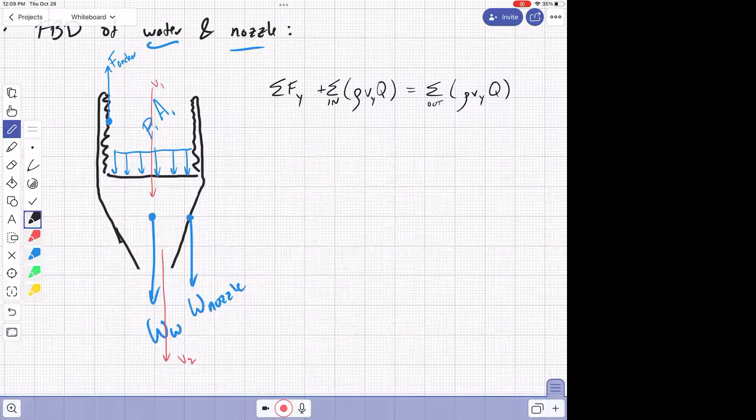Makes sense? I'm not sure. I can say that in this case, as far as what it's applicable to, it's applicable to any time you have moving fluid. Right. I was just curious because that's the whole idea of pressure and nozzles and the reasons you use them. I was curious if there was a video on that. Does that make sense? I don't think I'm making any sense, but... Well, at the moment, I can't think of one. So let's go ahead and finish this and we'll hang out afterwards and talk about it, see if we can figure it out.

Okay, so I'm gonna do the forces in Y. So I've got F anchor, minus P1A1, minus the weight of the water, minus the weight of the nozzle. That's all my blues, I think. Yeah, and that's why drawing a free body diagram is key, because once you do that, all you got to do is take this equation and then stare at the diagram.

Okay, plus, I've got an in and that's V1. So I'm going to do rho Vy. That's going to be negative, because it's going downwards. V1, and that's going to be Q. I'm only going to use one Q here because it's the same Q for both of them. But again, remember you'd have to split that up if there were multiple Qs. Equals rho negative V2 times Q.

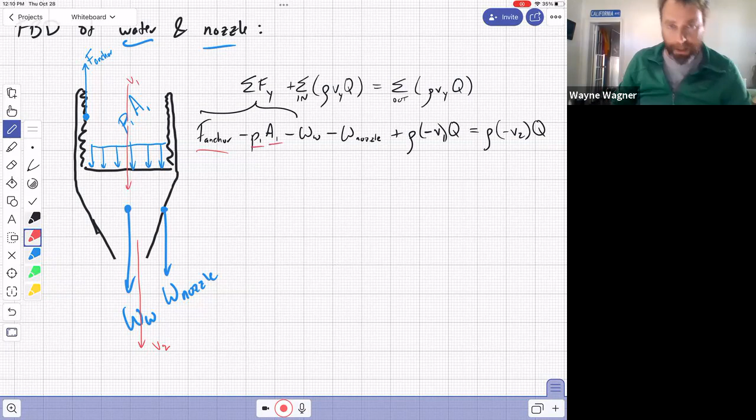So when I grade your tests, if you guys haven't noticed, this is what I'm looking for. I'm looking for this equation, and then I'm just going to see that you plugged in numbers. F anchor is what we're looking for. P1 is given. We can get A1, that's pretty easy. The weight of the water and the weight of the nozzle, we can get those because they gave us the mass of the nozzle and the mass of the water in the nozzle. So it's just mass times gravity in this case. That's pretty rare to do it that way in a fluids class.

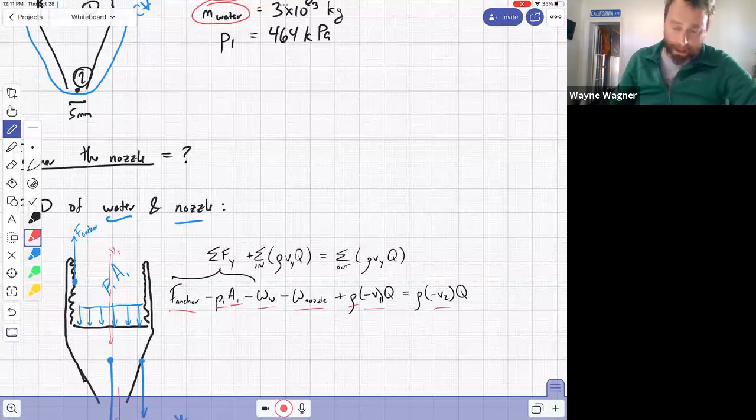What's the rho of water in this case? SI system? No. Dominic? 9810. No. Rho. Oh, 1000. 1000. Okay. V1 and V2 we're going to get from continuity, from Q equals VA. So let's go ahead and get V1 and V2 because that's going to be the only real problem here. I will never give you liters per second on a test. If you ever have a liter on a homework, you would look up the conversion. In this case, this converts to 0.6 times 10 to the negative third cubic meters per second.

So then we'll get V1 and V2. V1 equals Q over A1. V2 equals Q over A2. This is going to be 0.6 times 10 to the negative third cubic meters per second, and this is the same 0.6 times 10 to the negative third cubic meters per second. And then the areas, pi over 4, pi over 4. These things are not easy multiples of each other. So 0.016 meters squared, 0.005 meters squared. This is also a common mistake, getting the wrong number of zeros there.

So this is going to be equal to 2.98 meters per second. And this one is 30.6 meters per second. It's speeding up quite a bit, a factor of 10. So we'll go down here and I think we're ready to plug everything in. This would have been an easier problem for these particular things. So for a momentum equation, F anchor. By the way, I'll usually only ask you one direction. I usually won't make you do X and Y on an exam.

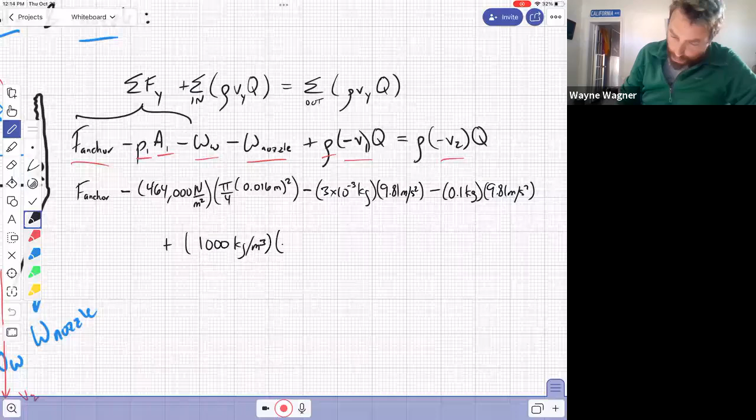Okay, let's see, keep going, plus, okay, the rho, 1,000 kilograms per cubic meter, times negative V1, 2.98. Okay, Q was given as... what was Q? Oh, 0.6.

Times 10 to the negative third cubic meters per second equals rho 1,000 kilograms per meter cubed. You know, these things really get long. Negative 30.6 meters per second, 0.6 times 10 to the negative third cubic meters per second. Okay, whole lot of junk.

All right, so let's see, F anchor. Again, for teaching purposes, I like to kind of get some numbers in here. Let's see here, minus 0.09329 kilonewtons.

Minus, looks like when I did this, for whatever reason, I did this in that... can't be right. Oh, interesting. Okay, I don't know why I did it that way. Give me a second here. 1, 2, 3.

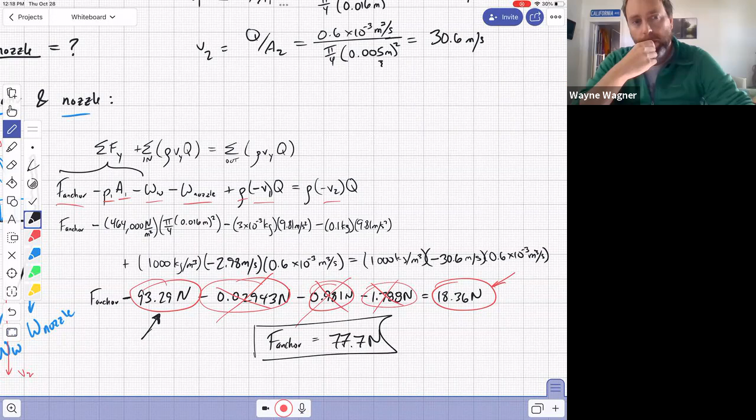Anyway, questions, comments? Would you have added that 93? I think I'm looking at it wrong. Never mind, I got it. Yeah, something's, oh, there should have been a negative on that 18. This should have been a negative. That's what it was. Yeah, you're right. And I'm pretty sure that that's 1.7. Sorry, I'm converting my notes in my head as I go, because my notes I did this slightly different. That's 77.7. Yeah, it's gonna go to the other side and be positive. Yes, that's good.

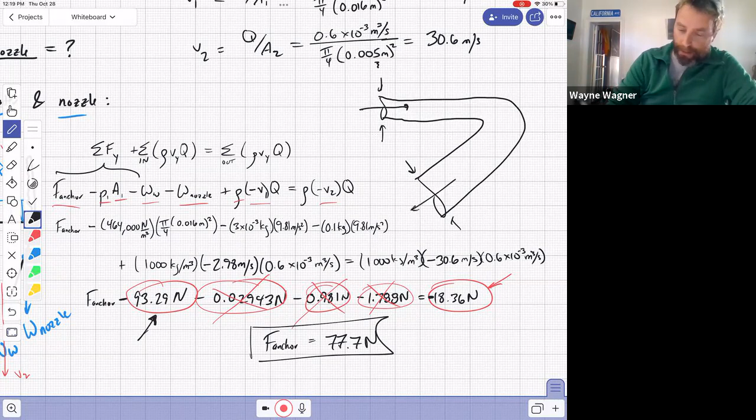Okay, so any questions? So you'll know my favorite problems on these really are like the bend that we just did. But usually what I'll do is I'll have a bend that comes in like this and leaves, and maybe it's narrow here and wide here. I like to do it like that because then we've got a pressure here, we've got a pressure here, we've got velocities here and here. And so it will force you to use Bernoulli. It'll force you to use the weight of the water. It might force you to do the weight of the bend, depending on whether or not I want the forces on the bend or the forces on the water. And I just love these problems. And of course, it's got an angle on it, which is always good, say 30 degrees or something. So those are my favorite types of problems. So, but it can all be done with what we just did.

Also, it's got a negative velocity right here. So this one has a negative X velocity and a negative Y direction velocity, which I like because it forces you to think in those terms. So, and so that's it. Any questions?